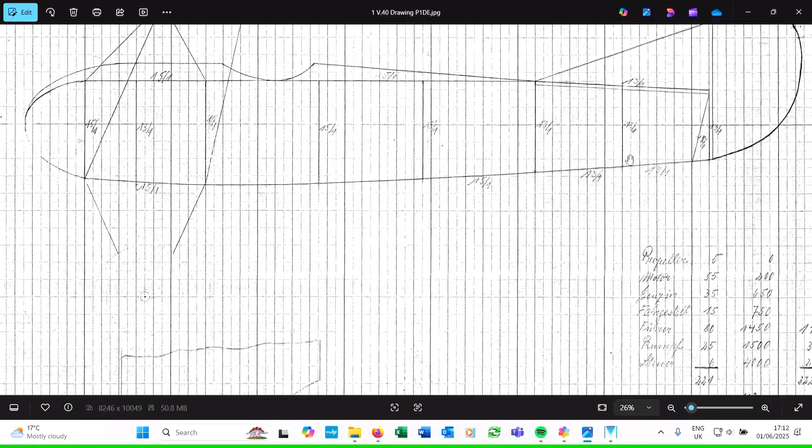So let's explain those two different varieties. Taking Achim's approach, one of the things I discovered in the Fokker archives in the Netherlands was this particular drawing, an original Fokker drawing of the V40. You might say that doesn't really help very much, but actually it does. It's 1/10 scale, an accurate drawing with information such as tube diameters for all the various parts. It has a weights table to give you an idea of just how much this aircraft should weigh. So there's enough information here to actually build an aircraft, particularly for someone with Achim's experience, given that he's built 21 different Fokker aircraft in his time. I think he's got enough experience.

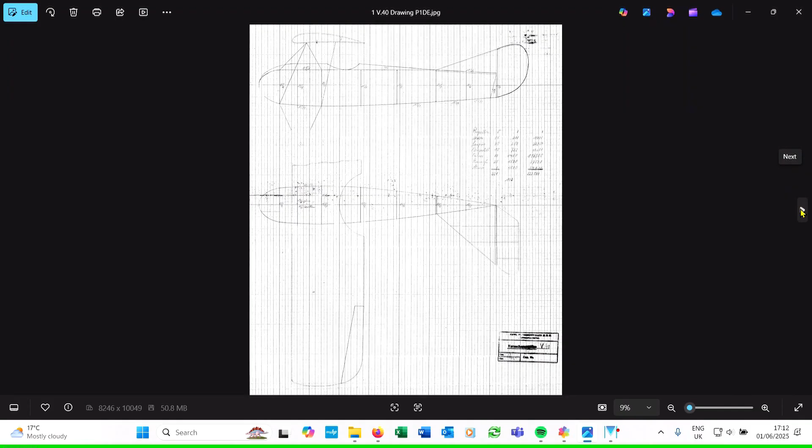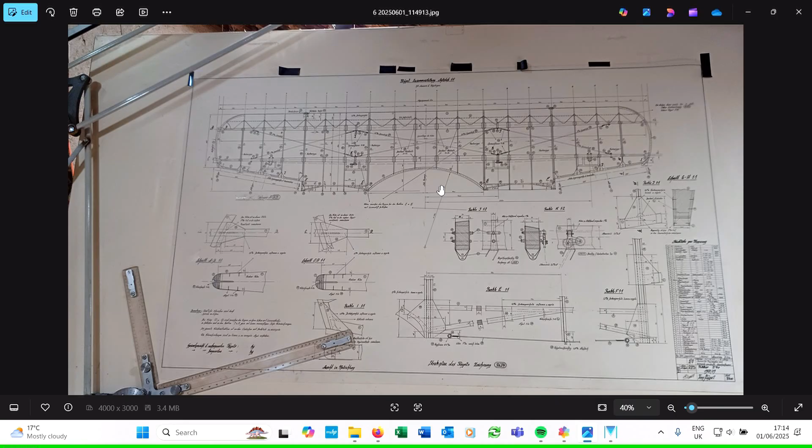So how do you get from one drawing and a number of photographs to a finished airplane? Well, you have to go through quite a few steps before you get there. One of those steps is to create proper engineering drawings for the aircraft. Achim does this the old-fashioned way on a drafting table, and the results are outstanding. The detail is more than adequate to go ahead and use to build an aeroplane. And there's a whole series of these photo plans - wings, fuselage, etc. So, having done all that, you can start building.

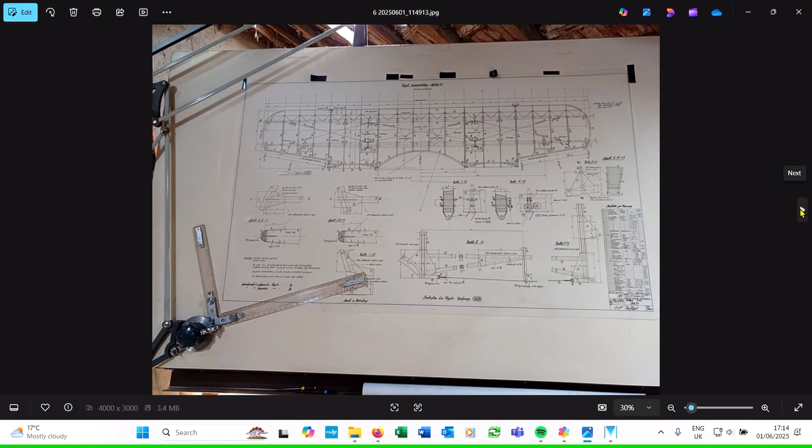So there's Achim's use of the archive - how he makes use of what little he has, plus his knowledge and experience on Fokker aircraft, to actually produce a fully flight-worthy aircraft from a number of photographs and one drawing. Pretty astonishing, really.

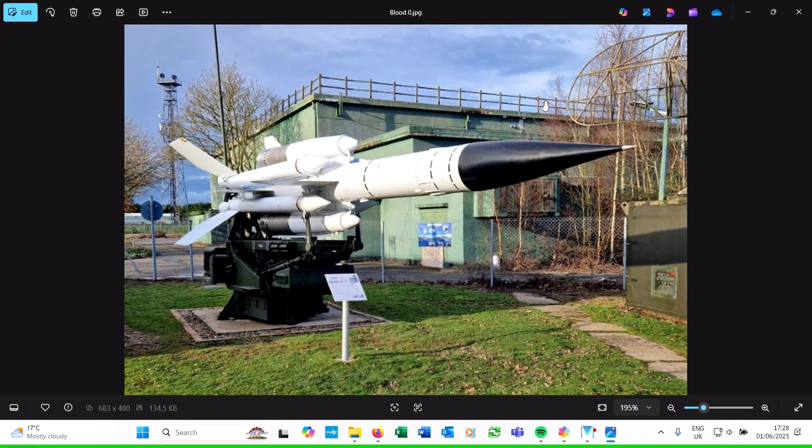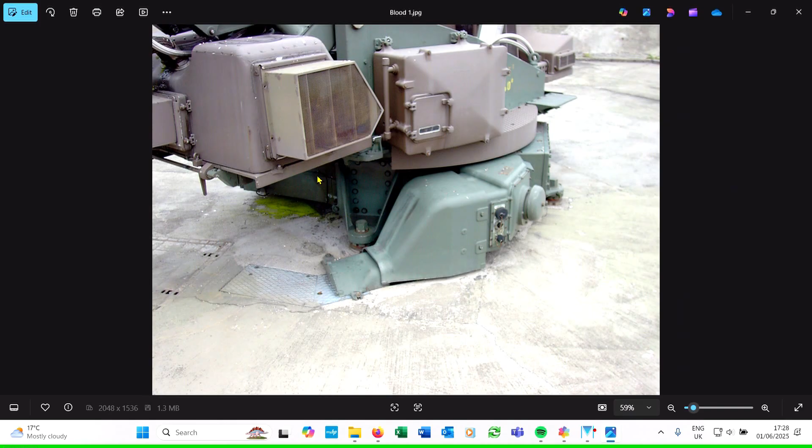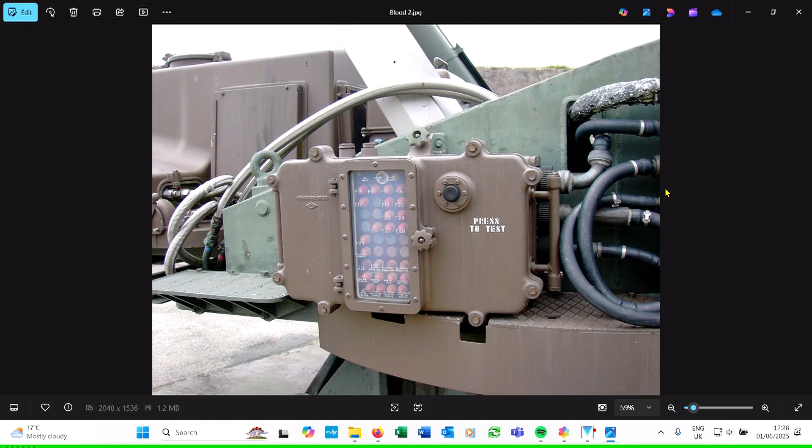A number of years ago, I was commissioned to design a 1/24 scale model of the Bloodhound missile, as shown here. As you can see, it's a fairly complicated thing. In the archive, I had a number of photographs of this particular item, and equally managed through other sources to find a lot of technical details which enabled me to model all of these things - the lumps, bumps, screws, brackets, clamps, pipes, whatever - in 24 scale. The end result was quite astonishing, but it took a long time.

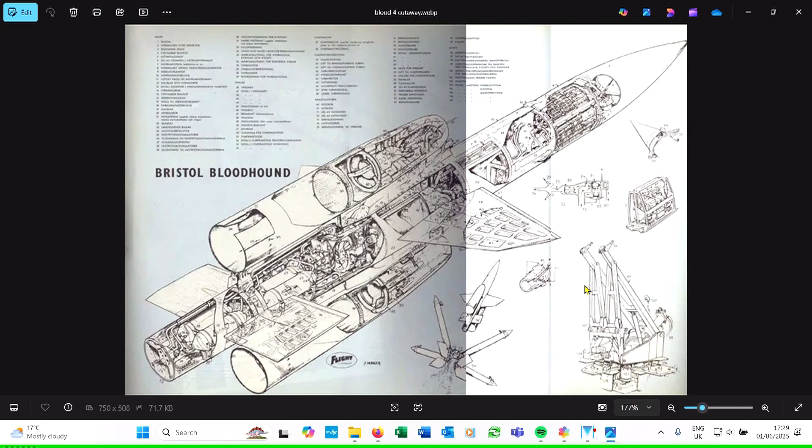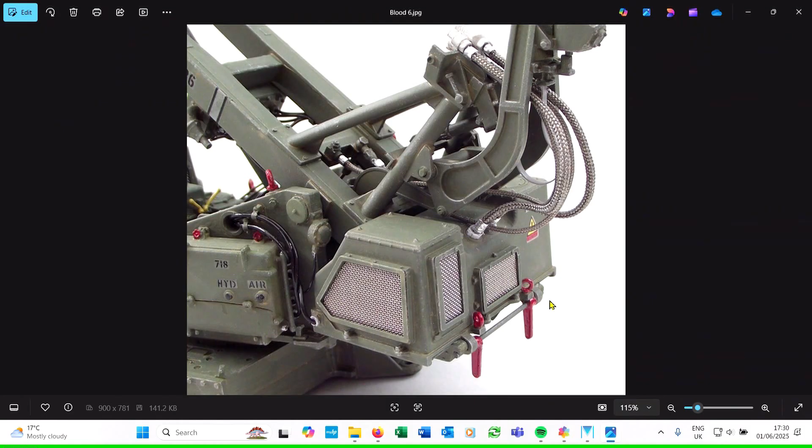And here is the model completed, painted in 1/24 scale. I challenge anyone to come up with things that don't look right, because it certainly does fill the picture. So my use of the archive in this particular case is to collect information, process it, and then use it to design this particular model in the CAD package. As I said before, it took quite a long time to actually do.

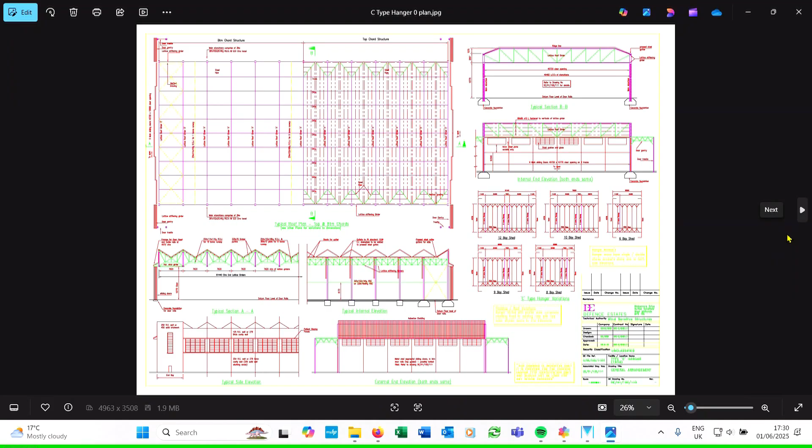On to other examples. Here we have an original drawing of a C-type hangar, roughly pre-World War II period, but used almost through the war as well. I was asked to create a 3D model of this particular hangar, full size, to be used in a flight simulator. So a slightly different method of using the tools - I didn't use a CAD package, I used a 3D package. But the end results, I think, speak for themselves.

The detail is there, all the structures are in place, all the bracing, all the steel structure is in place. There's nothing really that's missing from this model that would make anyone disappointed about what was done. Even the doors have got rivets and panels.

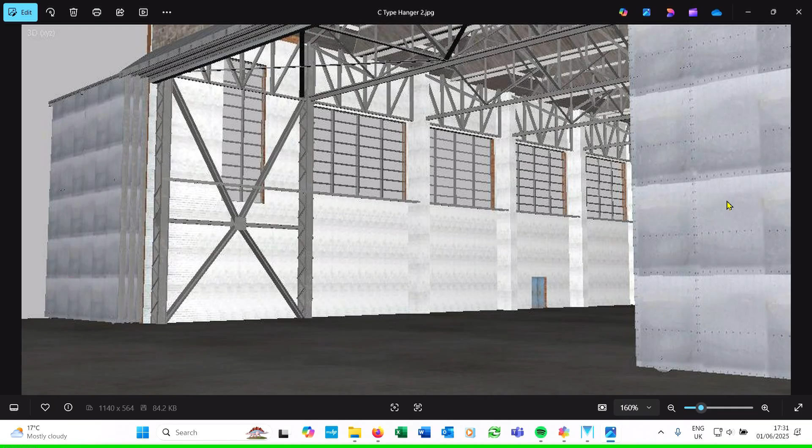So again, use of the archive to produce something from just one drawing, and obviously a number of photos were also used as reference points, mainly to get some of the colouring in the model itself. You can see here we've got brickwork on the outside, lots of different textures, lots of different designs, but all so that it could fit into a flight simulator. Just another example of using the archive to produce something that hadn't been produced before.

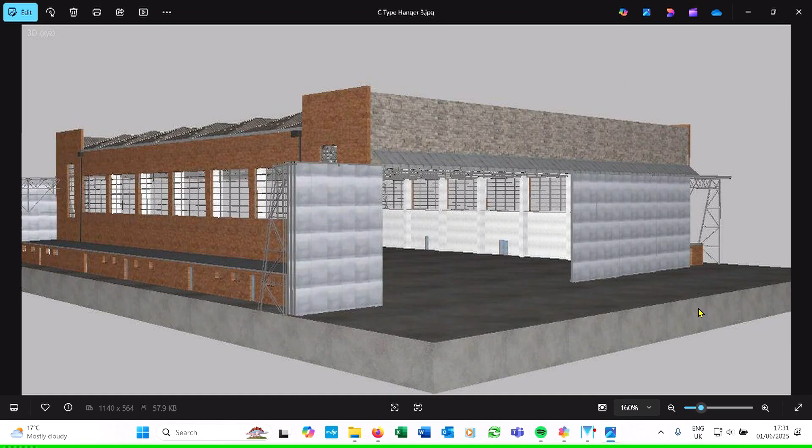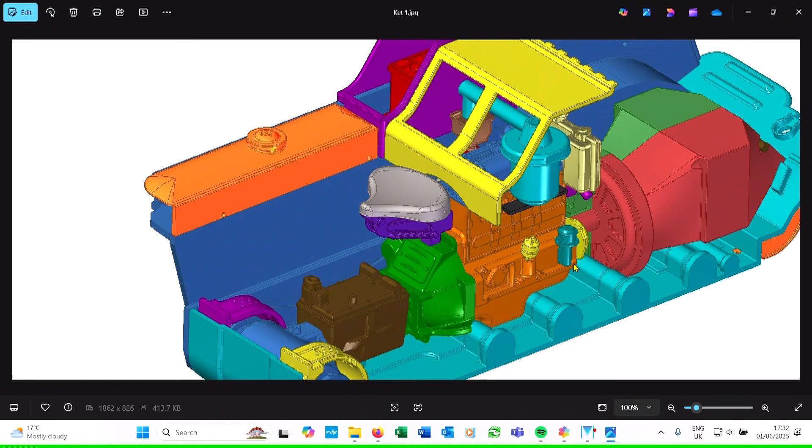These are some in-progress photographs, basically of the model as I was building it, giving you an internal idea of what the engine was like and various accessories, the water tank, the air filter, even the distribution box is there, the oil filter - all done from a detailed set of photographs and some scale drawings. So the archive provided me this information that allowed me to design this in a CAD package.

Now, one of the things I was always concerned about when I'm designing a model in 24 scale is what wall thickness am I going to apply. The panel here on the top, which is the access to the filter, is probably only about 20 SWG, maybe 24. But in the model sense, it's 0.7 of a mil thick, so that it can be printed properly. So consideration has to be given to the materials that they're printed in, but also the printer's capability to actually produce the detail given what you're actually designing.

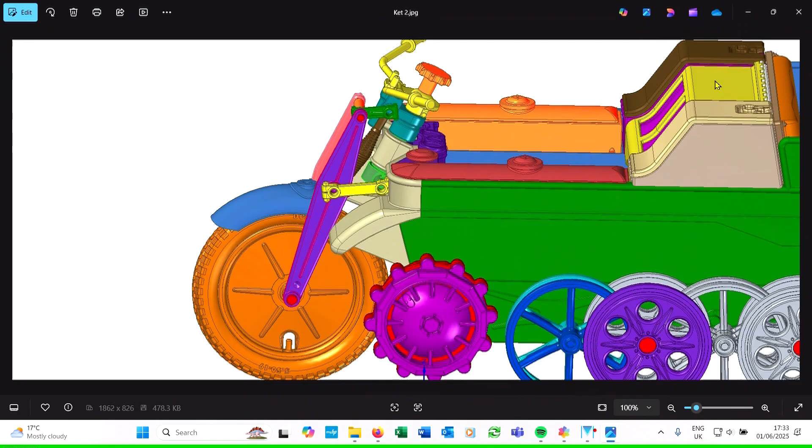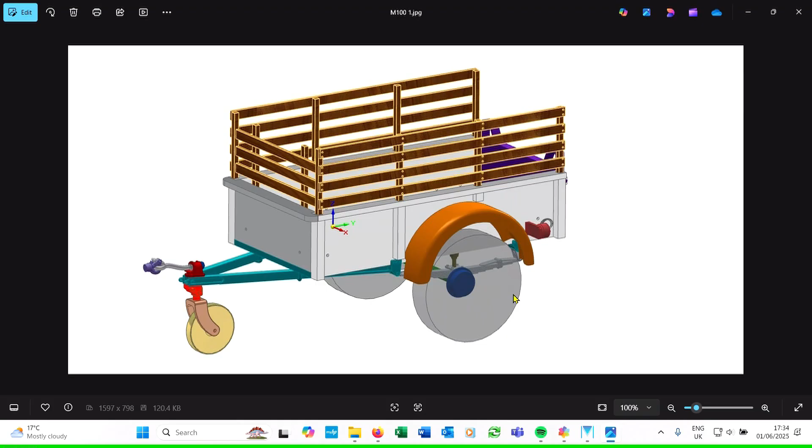So you can see then that the model has to be designed within the limitations of the printer, but equally it has to look realistic, it has to fit.

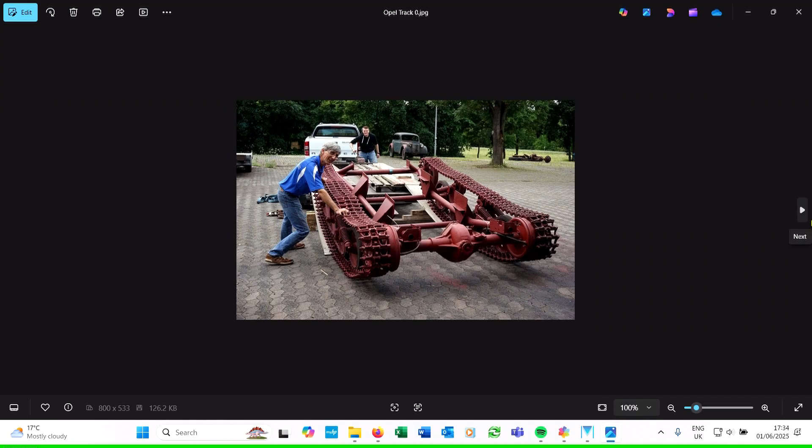Another interesting project was the design of the Opel 3-ton truck's track system. Quite unique, very interesting design, and designed to fit on a 1/24 scale Opel truck. So as you can see, this is what it would look like if it was a complete model. And here we have the chassis and the wheels, the suspension system, and the tracks, all designed in CAD, all to 24 scale, ready to be printed and used.

So my use of the archive is somewhat different to most people, because I look at it from the point of view of using the information to enable me to design exact models of the actual live objects. So my approach is different to Ahim's. Ahim is more about very, very specific detail and specific information about things like thickness of wing ribs, what size timber does he use, what sort of fabric does he use, what kind of stitching does he use. For me it's different.

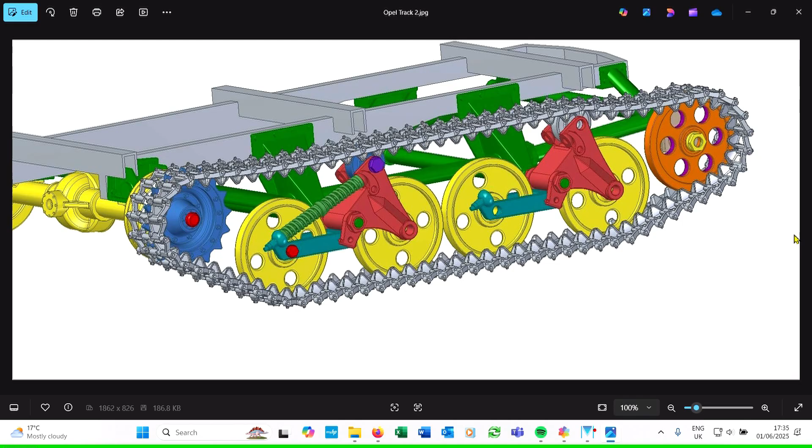I use it from the point of view of designing something to replicate an actual item in a reduced scale. That has some limitations, but generally speaking they work very well in 24 scale. So given the two examples I've just shown you, it should give you some idea as to the flexibility that the archive can present given different needs. Ahim's need is for extreme detail, my need is for extreme realism, given the limitations of what the models can produce.

So given that the archive contains lots of information about aircraft from 1900 to 1920, but also aircraft from 1921 to 1946, a load of general items, historic documents, railways, ships, uniforms, vehicles and weapons - there's pretty much a whole range of information here that people could make use of to do their own projects. So I hope that this little video has explained to you the possibilities that the archive can use in practice. It's now up to you to work out what you want to do.